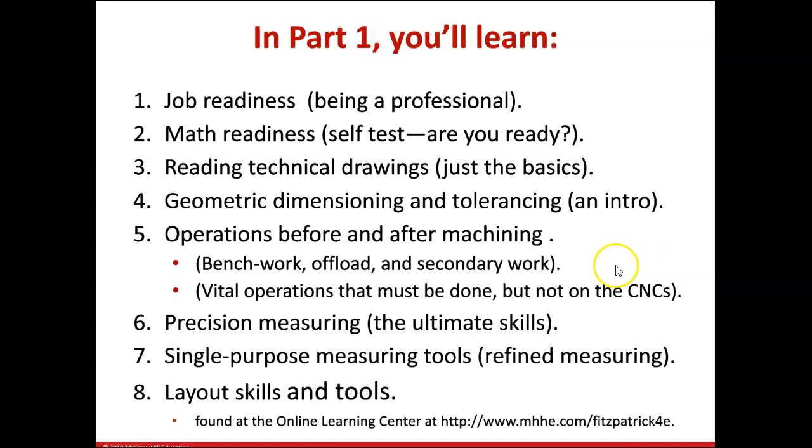The way this textbook is broken down: part one is your intro to manufacturing, part two is your intro to machining, part three is intro to CNC, and part four is your advanced technology. Here in ENGT 150 and 151, we're going to be exclusively dealing with part two in the textbook.

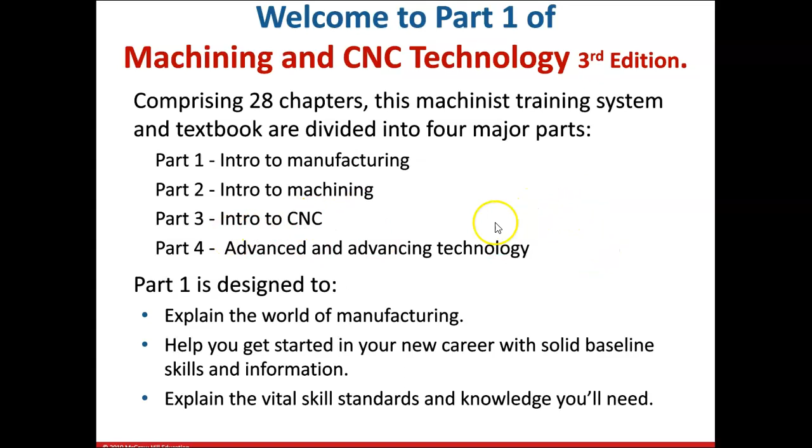So your reading won't be super heavy, but there is information in there that's valuable, and we'll be looking largely at part two. As you go, I will let you go through and stop and look at these slides as you want to.

But here's where I want to stop and discuss this for a minute. What are you really, really wanting to become? How are you wanting to use this information, learn, and take control of what you're learning in the classroom and putting it out on the job? So, as the question asks here, what does it take to be regarded as a Top Gun professional machinist?

Well, hopefully by now in your education, you realize that skill and knowledge are skill sets that we all have to have as machinists, as engineers, as technicians, in any of our roles that we do in a manufacturing or industrial technology environment.

There's also that third skill set that's a little harder for us to discuss, and that's the idea of professionalism—what does it really mean to be a professional? How do you act and behave on the job, outside of the job, especially if you're wearing your company's logo, and what are those expectations?

Now, we know and we've discussed how machine shops are precision quality environments. We talk about how you need to pay attention to a lot of really precise detail and become very meticulous and methodical in your thought process and in the way you approach a task. That applies as we look at becoming a professional machinist.

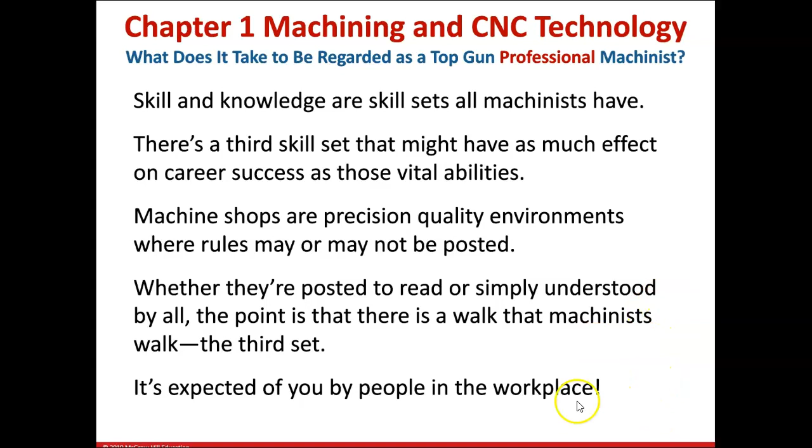Depending on where you work, a lot of times rules are posted, but there's also a lot of implied rules—things people refer to as common sense. Sometimes, as a young person, you may not fully know and understand what those expectations are. So you have to read the room a little bit, pay attention, and develop that skill of understanding implied rules or implied expectations.

So the author of this textbook, that's what they call professionalism. And of course, as we look at professionalism, these are certainly the things that are going to help you move up the pay scale.

In addition to your knowledge, your learning, and your skills, this professionalism will also help you climb that corporate ladder, so to say. Maybe get you from running the machine into the programming department, or maybe get you from programming into a foreman or a supervisory position or any other type of management.

These are the aspects of professionalism here that you kind of have to know.

All right, so what are some of the skills that we're talking about? Hopefully for many of you this is going to be a review. We largely talk about some of this in the OSHA related class, and you're going to get more of it there as well as in other required classes. Obviously we've got to have our personal protection on when working in a machine shop.

That includes the clothing we wear: closed-toed shoes, no loose-fitting clothes, nothing hanging loosely. We'll go over those, plus eye protection and hearing protection.

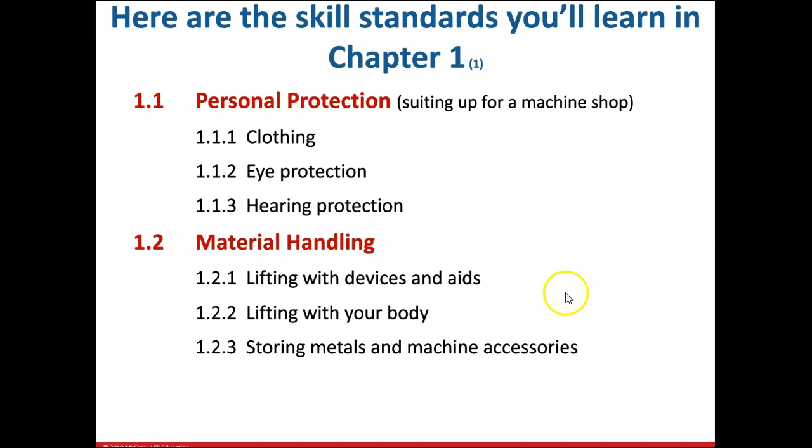We're also looking at material handling, since we'll be lifting parts on and off the machines we use. Sometimes those parts are long, big, and heavy; sometimes they're small handheld parts, but we still need to know how to handle them properly. We might use lifting devices or lift with our body, and we need to be aware of storing materials and the different machine accessories that go along with the machine.

Likewise, we have to handle all the shop supplies. That includes SDS, safety data sheets, your right to know what chemicals and hazards you're exposed to in the workplace, lubricants and properly lubricating your machine so everything runs correctly, and using and disposing of shop chemicals. Some chemicals can't just be dumped down the sink, so you have to be aware of the right way to use and dispose of all that material.

In the workplace, especially in industrial manufacturing in general, most places are trying to become what we refer to as lean and green. Honestly, this is also creeping into the medical community a lot as well.

So we've got to maintain the machinery the right way. Lean basically refers to a reduction of waste - we'll go a bit more into that. Green has to do with trying to make things as environmentally friendly as possible. I'd like to think the U.S., along with European countries, pretty much leads the way on green manufacturing, trying to make things better for our environment as we produce things.

There's a lean manufacturing technique you'll start to learn called 5S, a process most companies start with. It's basically a way to sort and standardize your workspace - everything in its place - so you have quick access and know exactly where it's at. You'll become a lot more familiar with 5S.

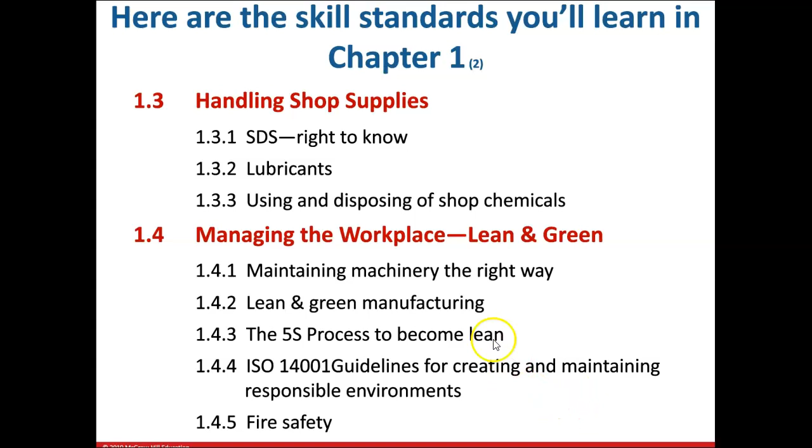All right, so you all know you need to have your safety glasses on - they need to be Z87 ANSI approved, so make sure when you buy safety glasses they're labeled, and in general they need to be side shielded. You can use clear or yellow tinted lenses in class, no other dark lenses - inside buildings the expectation is clear or yellow tinted lenses. Jewelry, whether rings, necklaces, or bracelets, is out because it can get caught and snagged in machinery, and a lot of jewelry material conducts electricity as well.

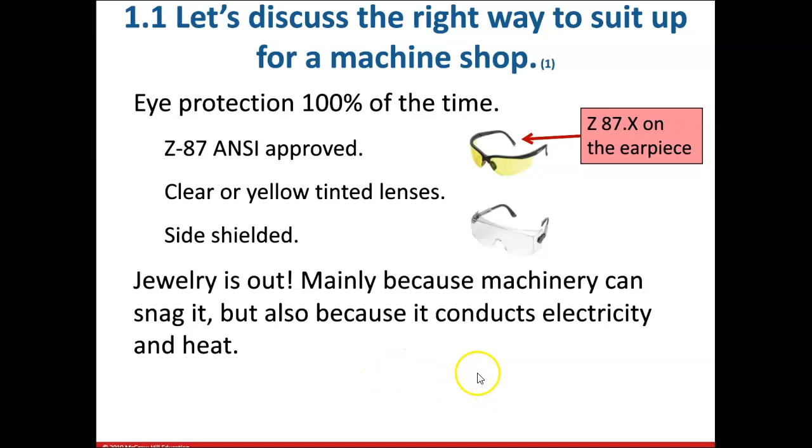All right, good quality work shoes - we've mentioned that, again this should just be review. I don't require steel toes in the class, but most manufacturers around the area do require them, so you would have to buy a pair of steel toes to wear. Also natural fiber, well-fitting clothing - you've got to be careful.

Some synthetic polymers that clothes are made out of, like nylon and polyester, sometimes will melt, and they can melt right to your skin if you've got hot chips flying off a machine. So you want to be aware of the natural fiber clothing that you're using. Either cotton or cotton blend is very good. I will oftentimes wear my apron or shop coat. Again with all of these, you've got to make sure to watch the ties and hanging pockets so they don't get caught. Nothing dangling or loose, including your long hair.

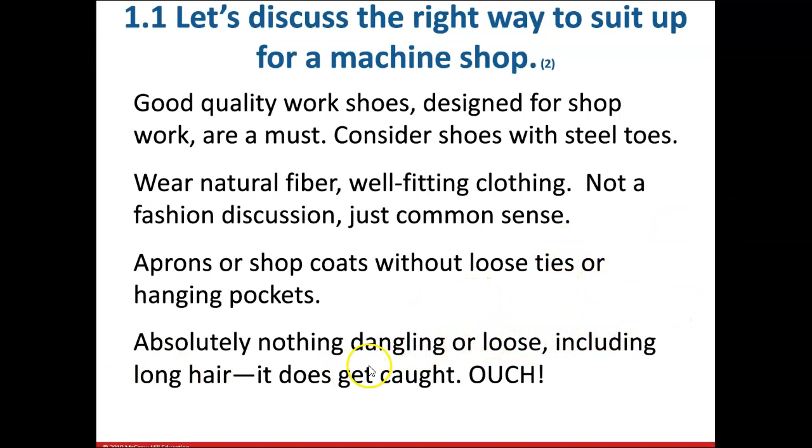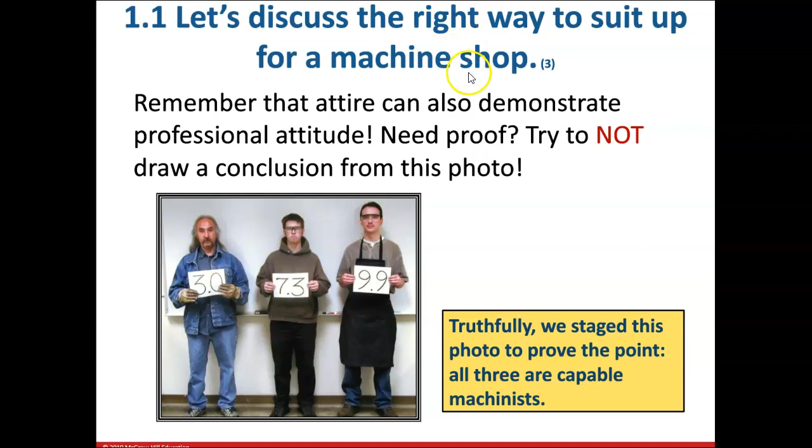Here's a picture of three individuals, giving you an idea as to whether their attire demonstrates a professional attitude. Which one of these do you think looks a little more professional? This is subjective, and in truth all of these are probably capable machinists. But there are certain things we'd be looking at, and not just us. We all form opinions based on how people pose themselves, the way they dress, the way they look. It's kind of natural human nature, not necessarily meaning it's right or wrong, but we do have these implied thoughts sometimes. And if you're somebody in management reviewing employees for performance reviews or promotion, that might come into play based on how the person is dressed and their professionalism.

So, handling materials here. In our lab we're working with a lot of plastics or composite lumber, so it's not hugely expensive material. But out in industry, a lot of times you'll be expected to manage expensive technical materials. I've machined materials like Inconel and titanium in my work career - those are very expensive materials, so you've got to be aware of how to use and handle them. Same thing with carbide - carbide is more expensive than high-speed steel, and it's also brittle. If you just bought a brand new $250 carbide end mill and you drop it on the floor, you just ruined that end mill.

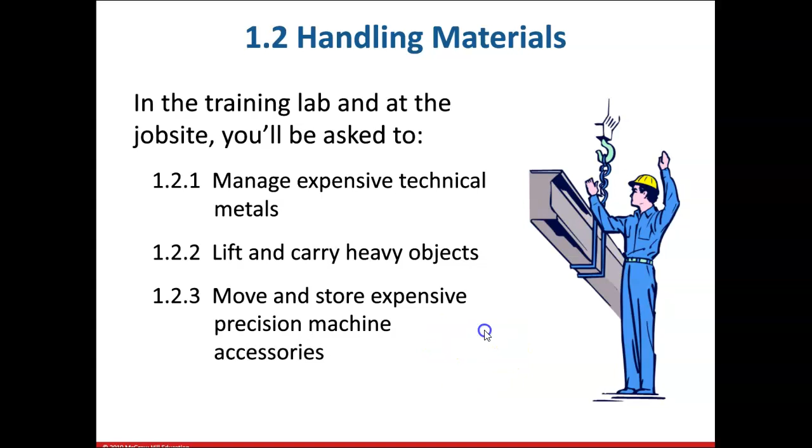So you've got to know how to handle those materials, how to lift and carry them, and storage of all these machine accessories as well as materials is also important. We do not have any overhead cranes, but we do have some lift tables and floor jacks that you might need to use if asked, so be aware of that. I'll show you. And the one thing I want to make very clear: if at any time you do not know, the first and foremost thing you need to do is ask - either myself or the lab assistant - so we can give you proper instruction on lifting, the way to lift items, movement of those items, or even how to set up and run something on the machine.

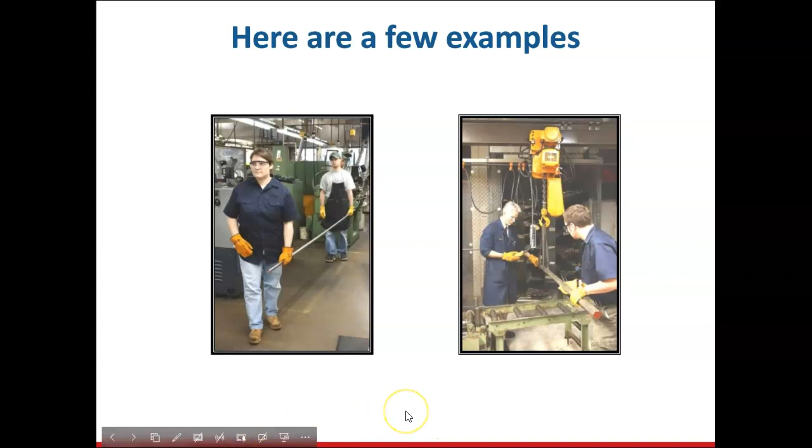A couple of examples as far as moving material safely - sometimes long parts require two people, or long heavy stuff, so ask and get help.

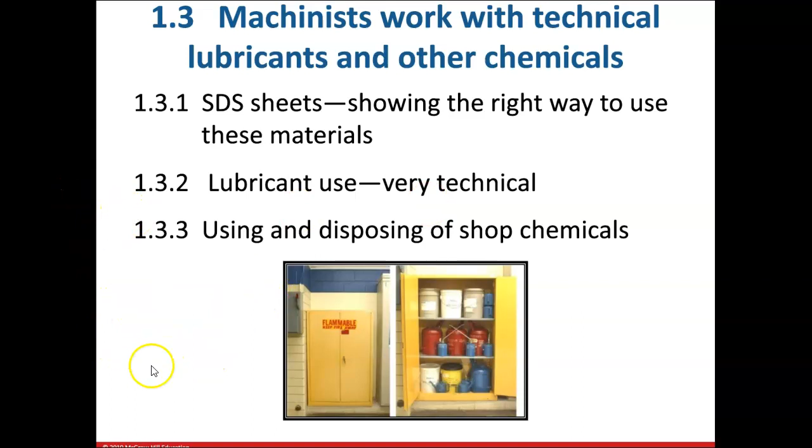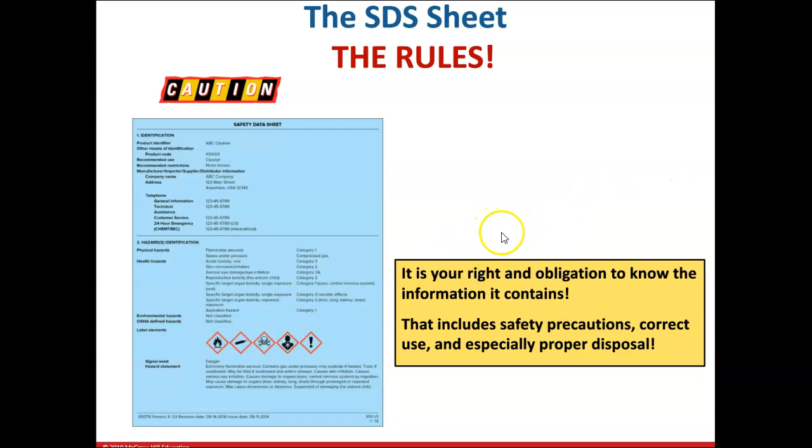Be aware of your safety data sheets at any job. We're going to talk a little this week about using lubricants on the machines at startup or at the end of the day, just making sure everything is good to go. And we'll discuss through the course using and disposing of any shop chemicals. You'll go over learning how to read an SDS in the OSHA class, so you'll get more familiar with this as we go.

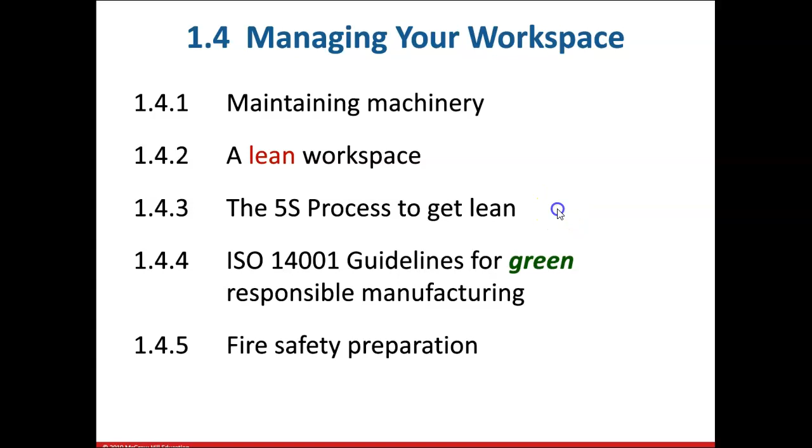Talking about lean manufacturing, your workspace - we all have a responsibility for maintaining the machinery, keeping things cleaned, organized, neat, and not just leaving things laying around. Now, I'll admit I'm kind of guilty of this myself sometimes too. So it's something we all need to be aware of and work together to remind everybody and help each other out to keep the lab clean and in good working order, so it's ready to go every time we need to go back and start setting up or running and cutting parts on the machines. This is all part of that maintenance aspect of the machine that we'll go over this week.

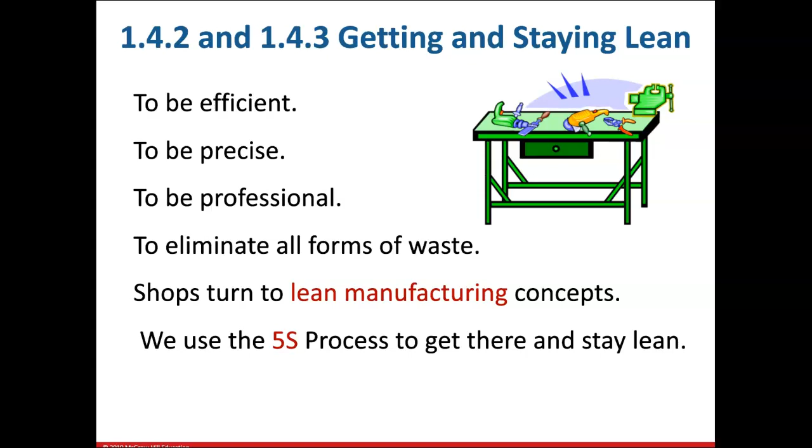So, going back into the whole lean concept here: be efficient, be precise, be professional, always be looking.